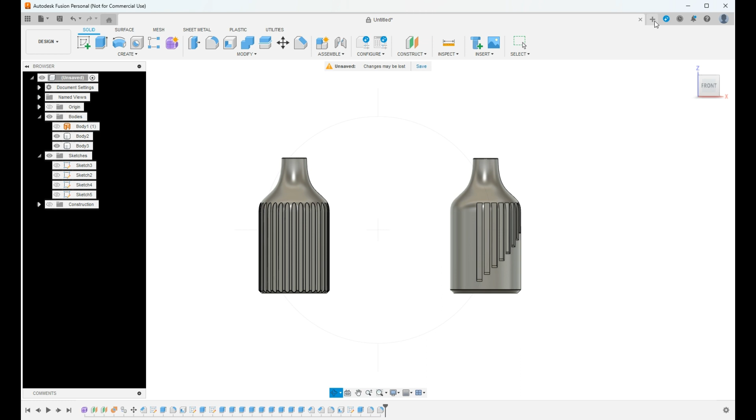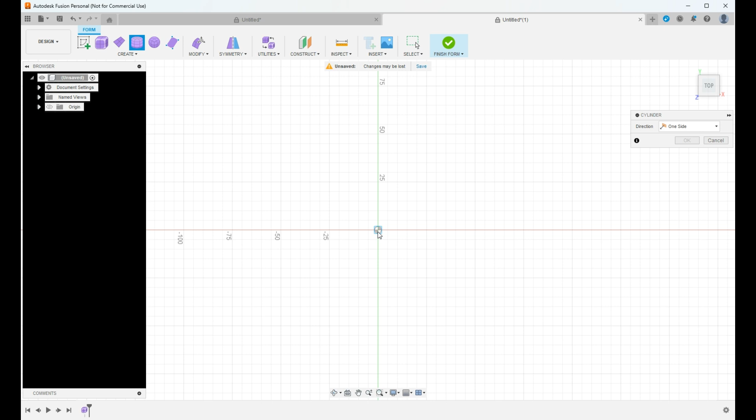In our new window, I'm going to start from the top plane. I really enjoy using the form tool for creating vases, so we're going to create a form, and the cylinder is going to be our closest shape to the finished product. Most vases I like to think of as being at least twice as tall as they are wide, so we're going to come to 102, or about 4 inches.

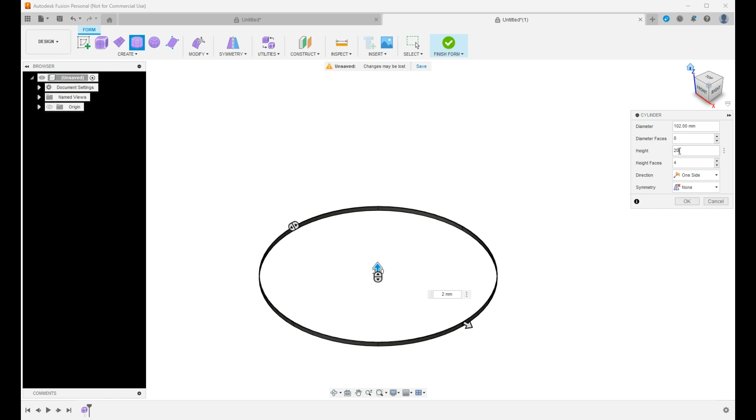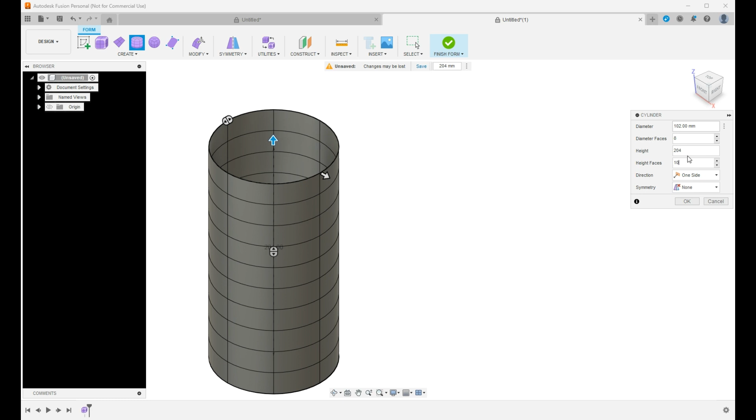And then we're going to come up to 204 millimeters. Here is our very, very basic sketch of our vase, and you can see it's just a cylinder, nothing to it. I'm going to add 10 at a minimum height faces, and I'm going to keep my diameter faces at 8 for this project. Now all we need to do is really modify and make them look how we want them to appear. If you're following along, you can create this however you would like.

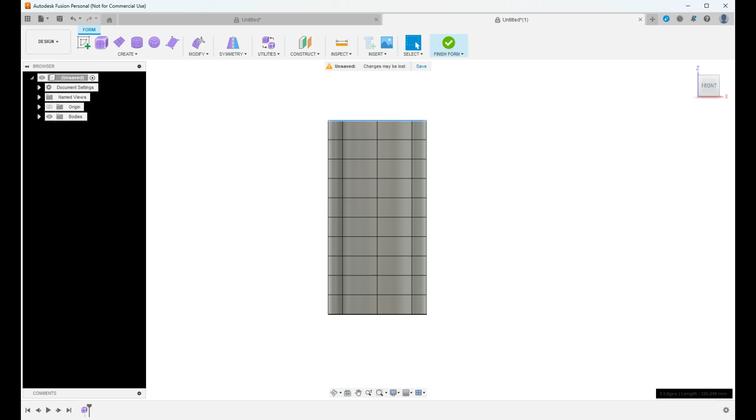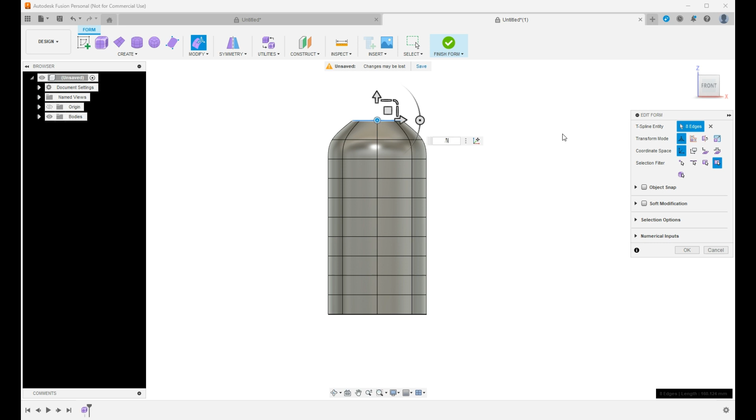I'm going to create this to match what we did earlier. So on this top line coming across here, just a simple double click, right click, edit form, and we're able to affect the edge of the face essentially and bring it in or out. Now I want to keep this, knowing that my diameter is 102 millimeters, I'm going to try to bring this down to about 50. It's going to be a little bit more than 50, but we're going to go to 0.5 and then hit enter. From here I should be able to start to design this and match up with what I want.

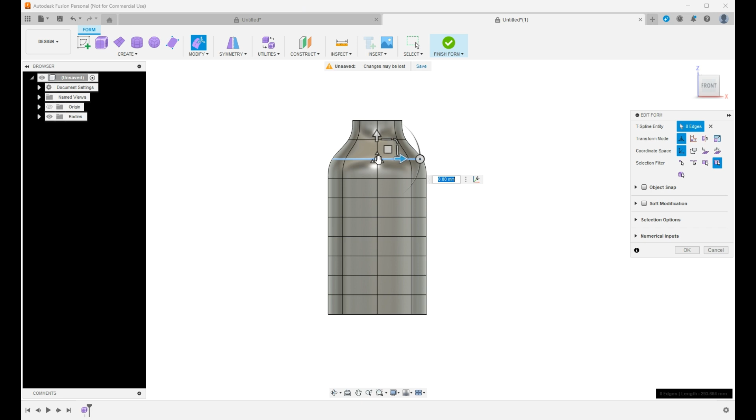Again, I'm going to come down to 0.5 one more time just to get us a nice clean edge. And on this next one, I'm going to bring it down to 0.75, maybe even a little bit more, maybe down to 0.65. Right here you can see I've got a really nice clean base, it looks very similar to what we have earlier. Maybe I'll even grab this one as well and shrink it down just a little bit, just to give us a nice clean edge. Okay, something like that.

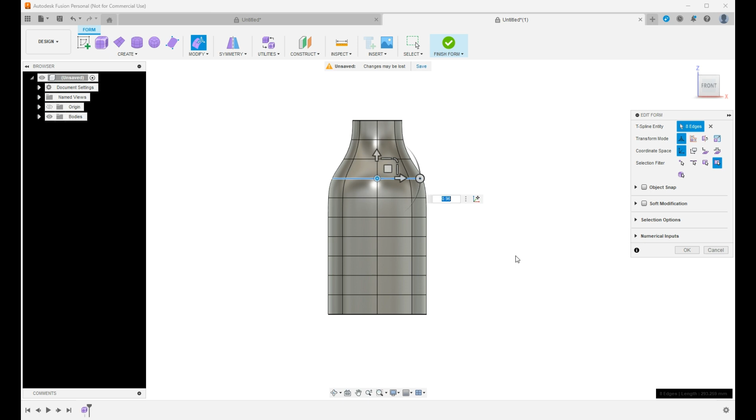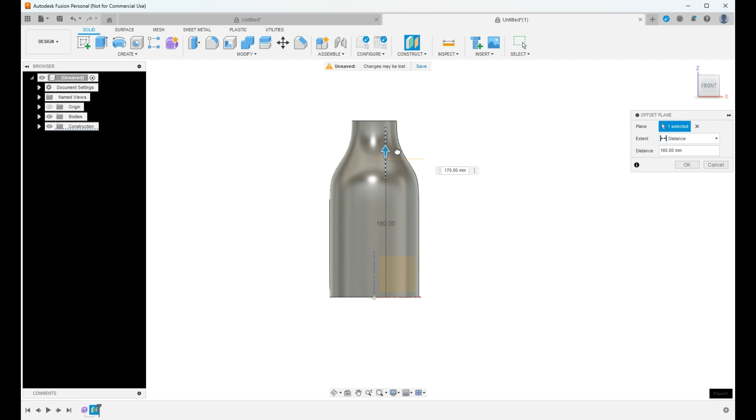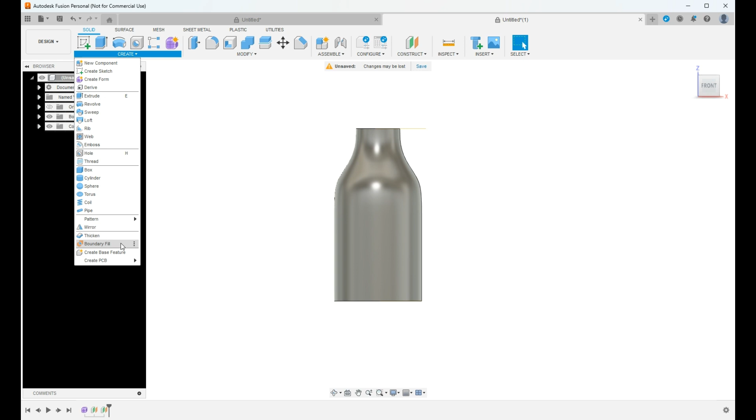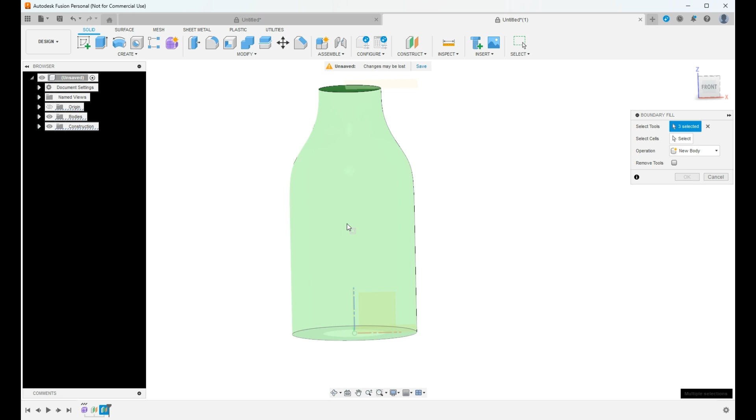I've got my planes. Now what I need to do is create a boundary fill, and this is a tool I use a lot, it's very, very simple. All you need to do is select the top plane that we created, the object that you would like to fill, and the bottom plane that we created. Now this bottom plane is going to be this tiny, tiny little one that we need to grab right there. Once you select all the right ones, it's going to turn green, and it'll have a little checkbox right here. We're going to select that checkbox and create a new body, and say okay - there you have it.

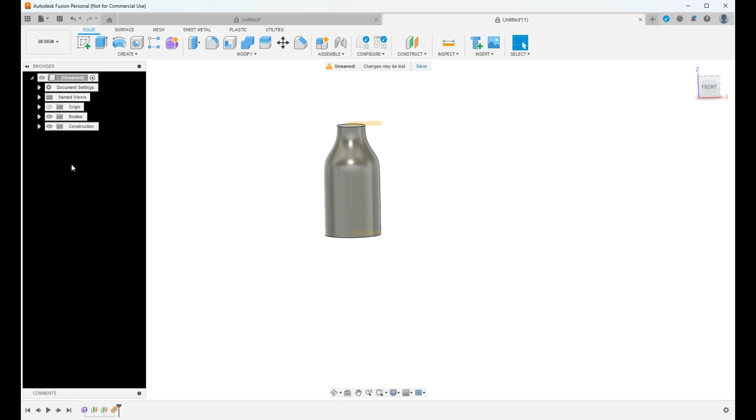So now we've got our basic bottle-shaped vase, and from here we need to make it a little bit more decorative. What I like to do once I get to this point is turn off my construction planes because I don't need to see those. And I'm going to duplicate this a handful of times. The reason I do that is when I'm designing vases, sometimes I'll design 10 or 15 different patterns and play around with it, really just use my imagination as I'm building these. It'll allow me to pick the best ones to add to my store, or if I'm just creating stuff for the house here, I can pick what's best. So we're going to copy this a couple times.

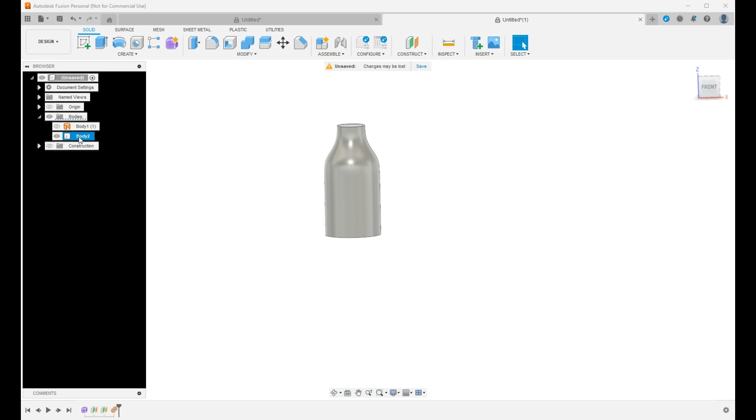So we're going to turn off the mesh that we have there and go into our body, do a simple copy, click out here, and a simple paste. I usually just grab this and pull it to the side. For this case, I'm just going to do the one. I'll usually duplicate this a handful of times, like I said, and say okay, now I'm going to turn off body 3 for a minute, and I'm just going to work on body 1.

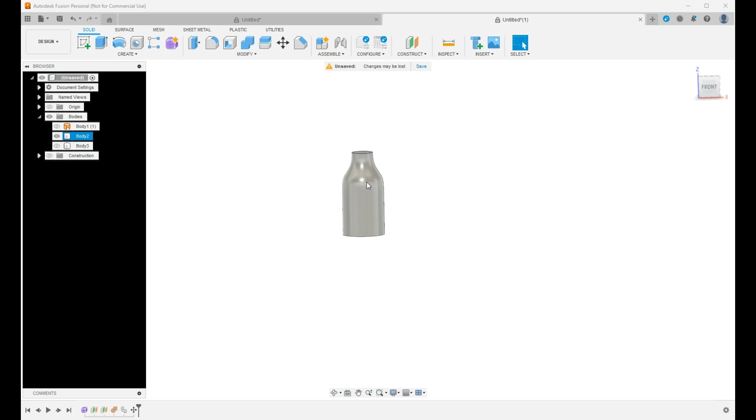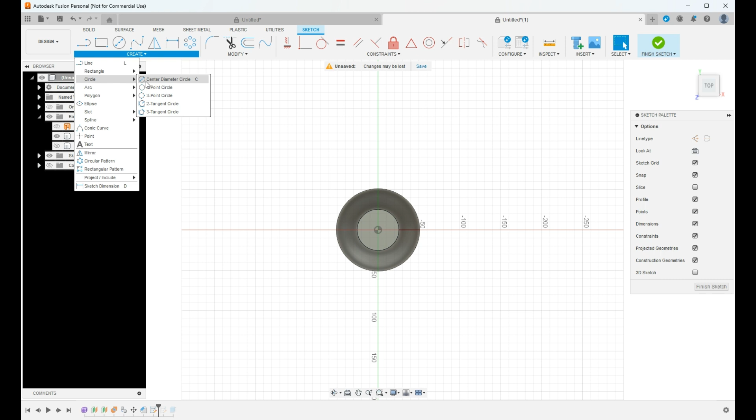Our next step is to go in and add our pattern or the decorations to this vase. So I'm going to go to the top and create a new sketch. On this sketch, I'm going to use our circle and use a center diameter circle. I like to start right on this edge, and I'm going to pull this out to 6 millimeters, which means I'm going to be cutting into this vase about 3 millimeters at the very, very thickest point here.

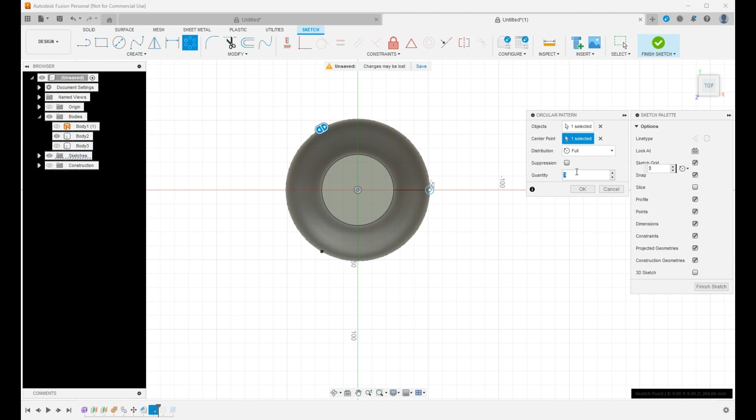Then we're going to do just a simple revolve pattern or circular pattern here by selecting our object and then selecting the center point. I'm going to go somewhere around 28 with this. Now that we've got our 28 circles, I'm just going to say okay and finish the sketch.

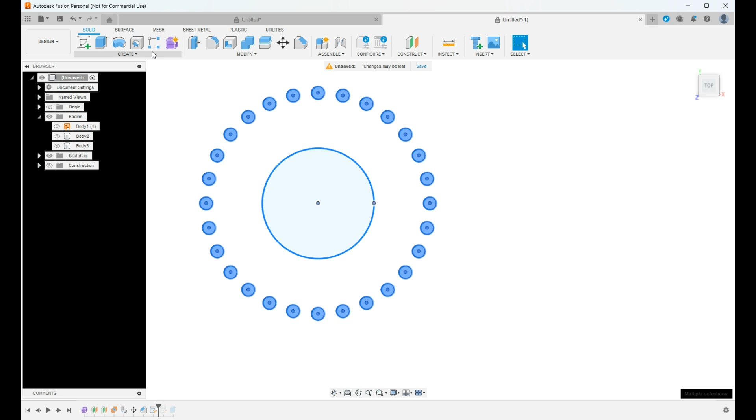At this point, we can do a really, really simple extrude with these. So I'm going to turn off this body really fast, select all of these, hold shift and unselect this center piece here, and turn our body back on. Give us a little bit better of an angle, and we're going to do a simple extrude down through the entire piece and say okay.

And that looks pretty good. Looks just how I would hope it would look, and should be really, really clean.

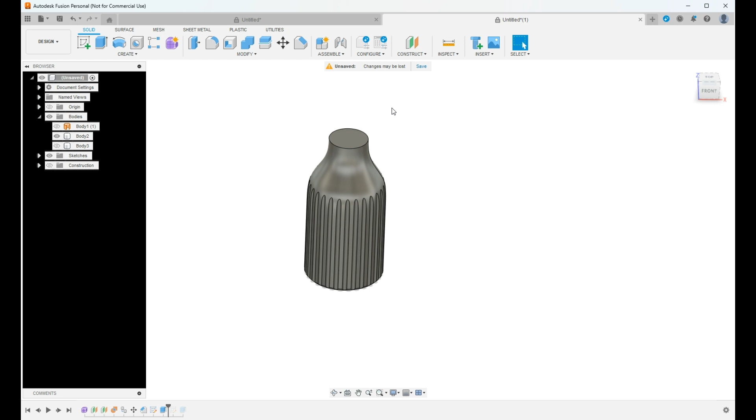Now the next step is to add a shell to this. So we're going to grab our body and add a simple shell. I usually try to do these at 2. Sometimes when you add in these decorations, it gives you a little bit of a fit. So we're going to start this at 2 and see if this works.

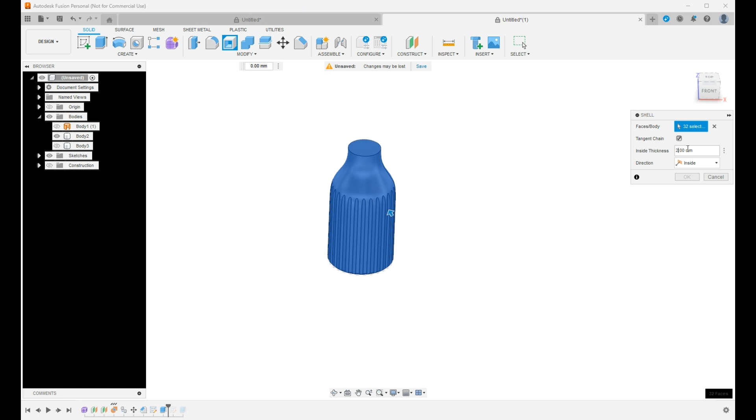Now, if you have a slow computer or you have a lot of things running like I do, sometimes this can take a few minutes to run this command and see if we can actually do it. After I played around with this for a little bit, it looks like 1.5 is the number that it's going to let me go and set. So we'll say okay.

And now the inside of this is hollowed out. Again, like I said, you've got to play around with these to figure out exactly what the best option is going to be and what it's going to give you. Ideally, I'd like to set that to 2, but it looks like that's just not the case for this design.

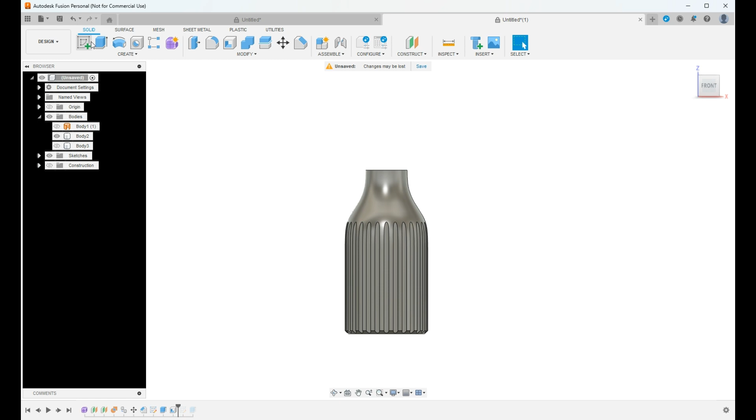Now, the very last step is just to clean off this top so you can actually see down into this. There's a couple ways you can do that. You could just push down. I prefer to just cut off the top. Again, I know that I've got 4 millimeters up here to cut off. And so that's what I'm going to do. I'm going to choose the front, zoom out a little bit, grab this plane.

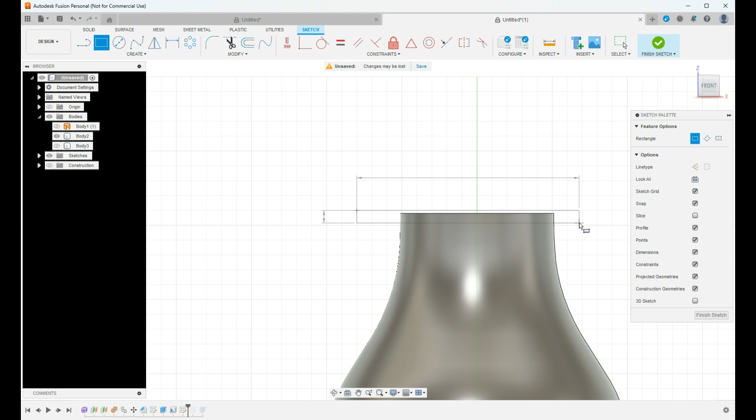Now I'm going to be right in the middle of the object when I draw this. So I can come down here, come down about a little less than 5, down here to about 4, and say finish sketch.

And now with one more simple extrude, I should be able to get this done. So we'll select the sketch, and then I want to make this symmetric and just pull this across and say okay.

Add 0.5 just to kind of clean up that edge. You don't want sharp edges on the top of these when I don't have a whole lot of sharp edges on this object. And that's it. There is the first one done and ready to go.

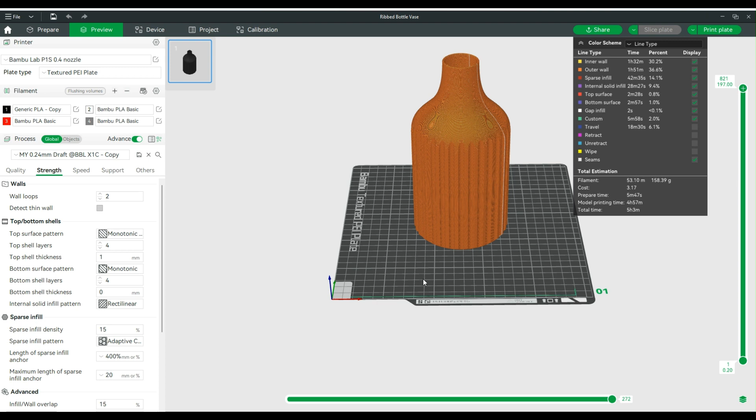After throwing in the ribbed vase, this is what we see in Bambu Studio. It looks like it's going to take about 5 hours and 3 minutes to print at full size with 2 walls, 4 on the top layer, 4 on the bottom, and 15%.

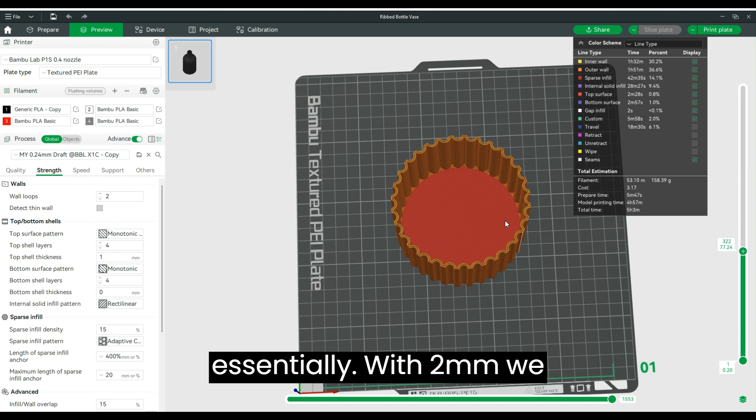This actually really doesn't matter, as I was talking about when I was designing it, because we should get, essentially, with 2 millimeters, 5 walls total, 2 inside, 2 out, and then 1 full wall through the middle, which is what we have here.

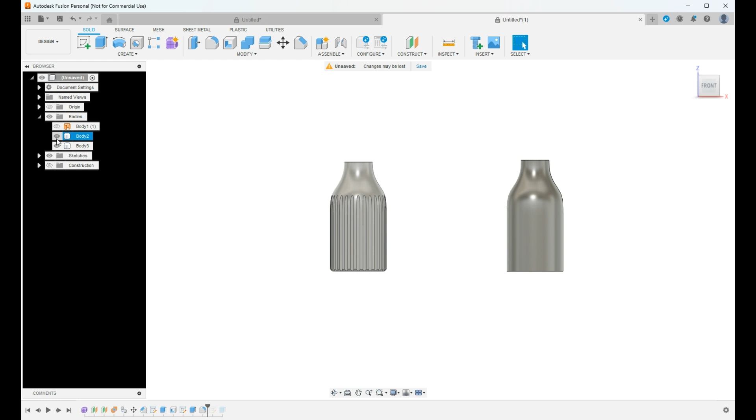Now, the second option that I have, this other body over here. For this one, we're going to do something a little bit different. We're going to design a pattern that's not as symmetrical. It's going to be a little bit different.

So on this vase, we are going to do the same thing we did on the other one. I'm going to add a small chamfer of 4 to this, just to clean it up a little bit. Let's say okay. And the next step is to follow very similar. We're going to come up on top here and do a simple sketch on top of this.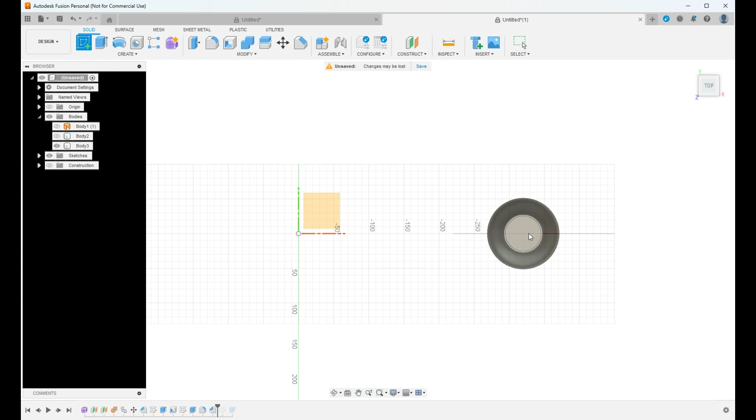And I need to create a circle from the center. So I need to find that center. Usually it'll kind of give you a pretty good idea when you're at the center. If you want to double check, make sure it snaps in there. So I want to come out here and snap in right to this edge, as close as I can get to this edge. Looks like it snapped in right there.

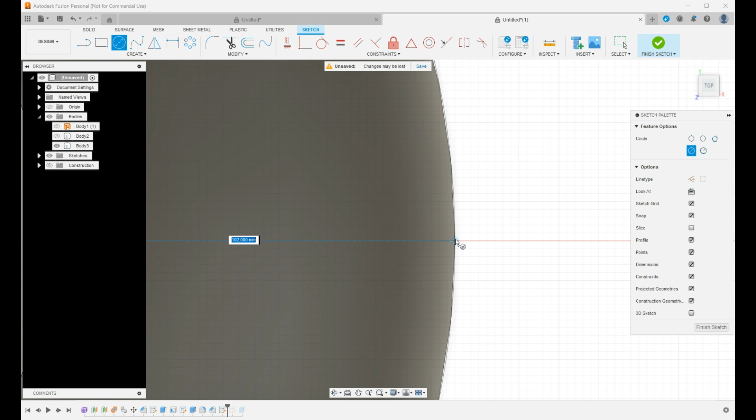And then I'm going to select that sketch and do an offset of -3 millimeters and say okay. Now I've got this line and this line. I can actually take this here and delete it if I want. Definitely going to want it to be out of the way when we go to this next section.

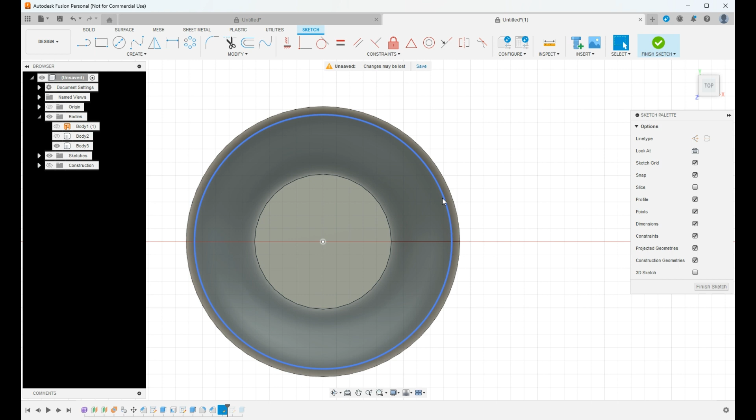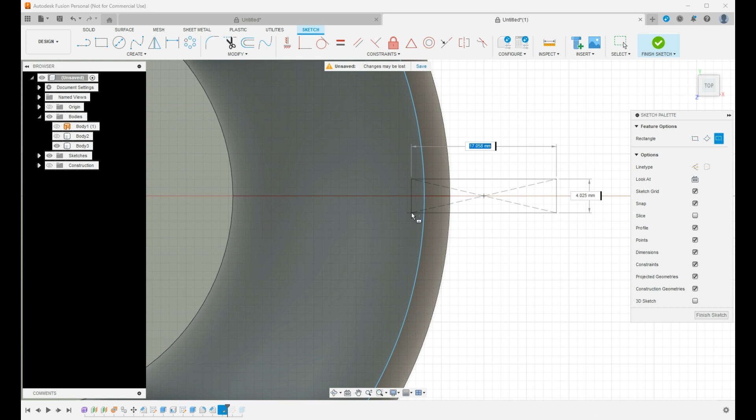So from here, I'm going to use my rectangle tool, and a lot of times I will use a center point rectangle so I can keep everything on line with this. And I'm going to grab this and set my gap to 4. And then I want to make sure that I pull this past this blue line. And just make sure you get it past it. You can make it as far past it as you would like, 4. And then I'm going to say enter.

So now I've got this shape here. And the reason we want this is it's going to keep us from having this sharp edge here. It's going to give us a nice flowing line when we do our next step.

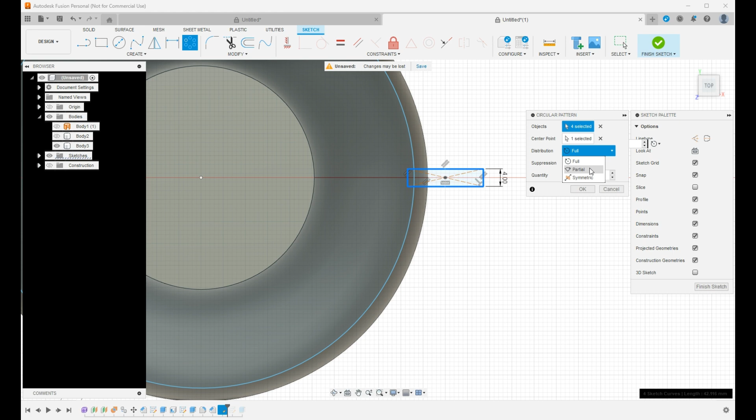So from here, I'm going to do a same circular pattern as we did before. Grab these and select our center point. Looks like I need to grab one more down here really fast. And I don't want to do a full, I want to do a partial distribution around this. And I'm going to set this to -100 degrees. This will just bring us out across the face.

And I want to go just past 90 just because nothing else is going to be symmetrical on this. Why not keep it to there? And then figure out exactly how many of these I want to put in. And we're going to go with 8, looks pretty good. And say okay.

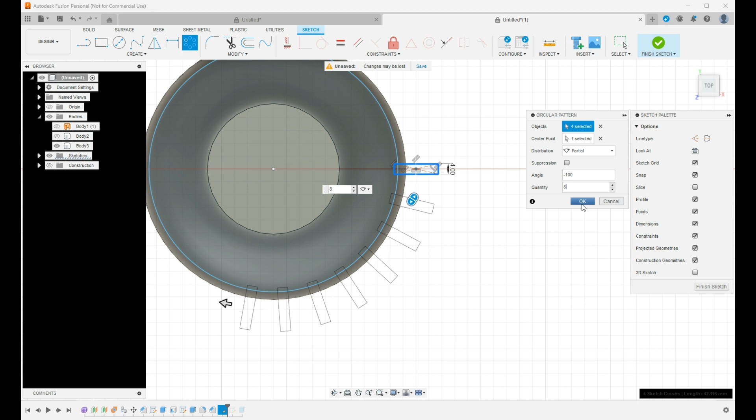So from here, we are done with our sketch. And we're just going to rotate this and revolve it. And I need to grab all of these and pull them down with just a simple extrude. But the problem is I'm going to do this one at a time. So I'm going to speed this up as I do this.

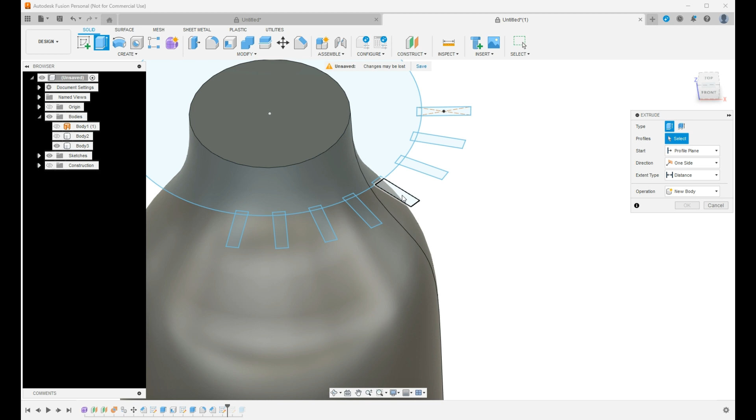Basically, I'm going to go down 100, 110, 120, 130, 140, 150, 160, 170, and it should give us a nice look that we're looking for. So we're going to grab this and pull this down to 100. Say okay. Turn our sketch back on and repeat that process. So stick around as I get this done.

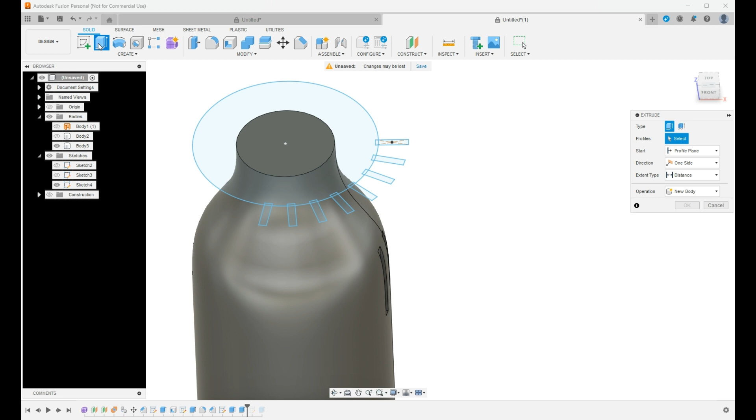All right, and we're back. As you can see, it was pretty quick, and I think it turned out pretty good.

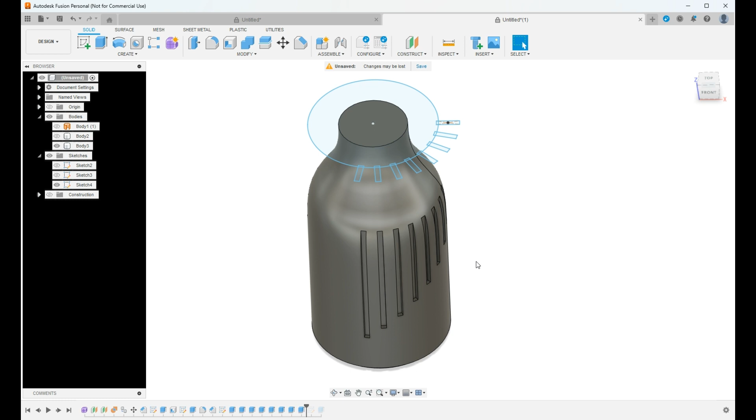I do like these nice thin lines. I think it adds an element of just unbalance to this that I really like for home decor. And again, you can play around with patterns, do whatever you like. That part is really easy.

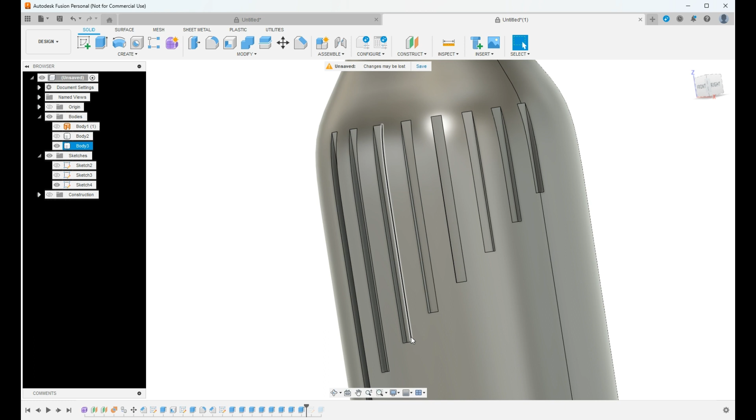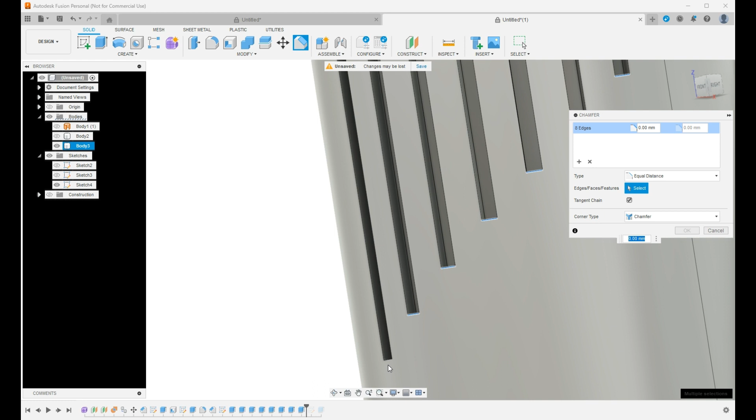Now I do need to add in one thing before we shell this. I need to add a chamfer to these so that we're not trying to print on an edge. The easiest way to do that is click on our chamfer and just grab this front part on all of these. I know I'm going to be close to about 3 millimeters, so it should make setting the chamfer pretty quick to get the actual number I'm looking for. So I'm going to rotate this a little bit, zoom out, and then zoom in just so I can see what's going on here.

And sometimes you have to kind of play around with this to get it to work. Looks like I'm going to have to just manually do this because it's wanting to jump around too much. Go to a 2 and a 3, which is where I thought I need to go. But it looks like that's going to be too much. So looks like we're going to play around with some smaller numbers here.

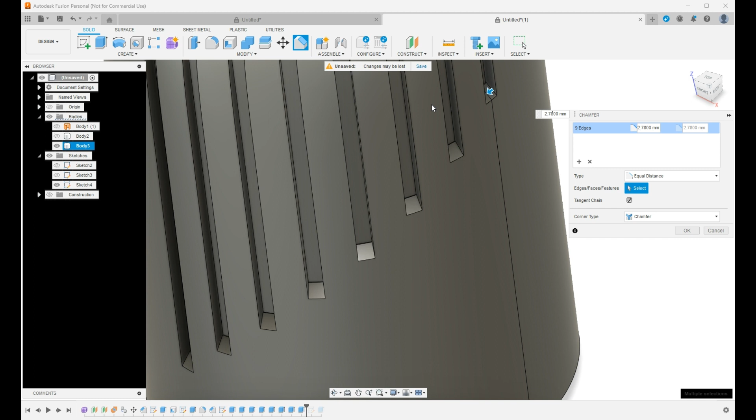7, 5. That looks pretty good. That looks like I've maxed that out. I still got a little bit of a shelf. Maybe we can go... There we go, so 2.9. And that, when we print that, we shouldn't have any issues. It should print really, really clean right there.

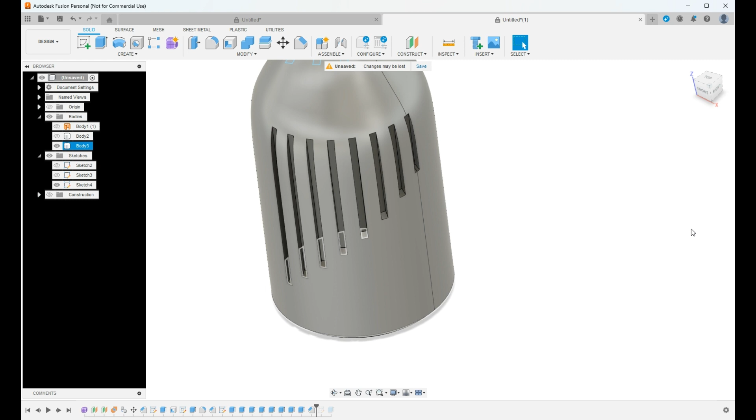Okay, and just like we did before, we'll turn off our sketch. And I'm going to select our body, and we're going to add a shell. Based on our results from last one, I'm going to probably see something very similar here, where we're going to set this to 1 and see if it lets us do that. Looks like that's the good number for us here.

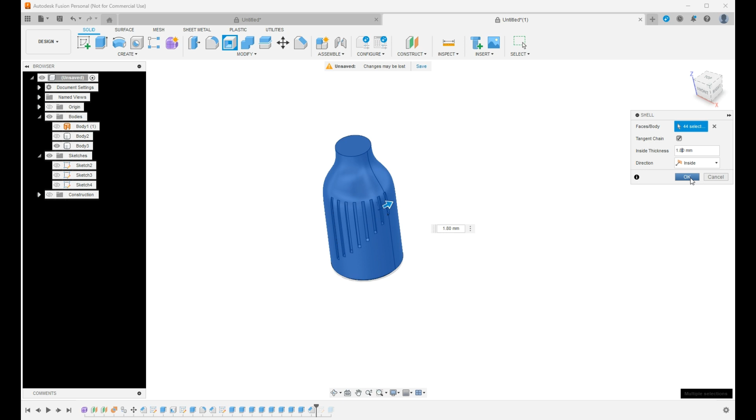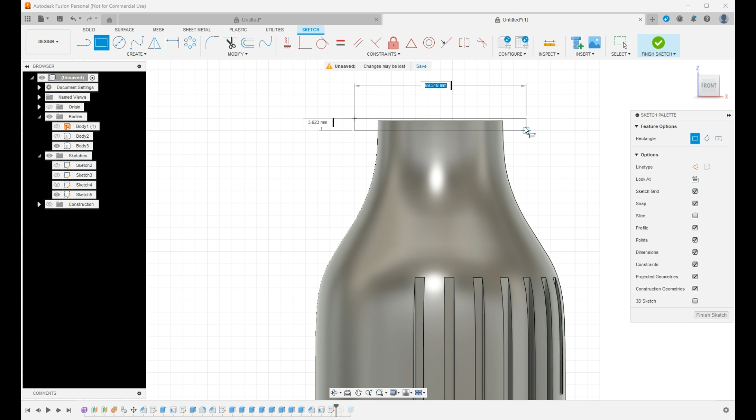And say OK, and we'll come and knock this top off just like we did before. Grab the front, and this should set our sketch right in the middle, just below 5. Sometimes these guidelines hurt more than they help. There we go.

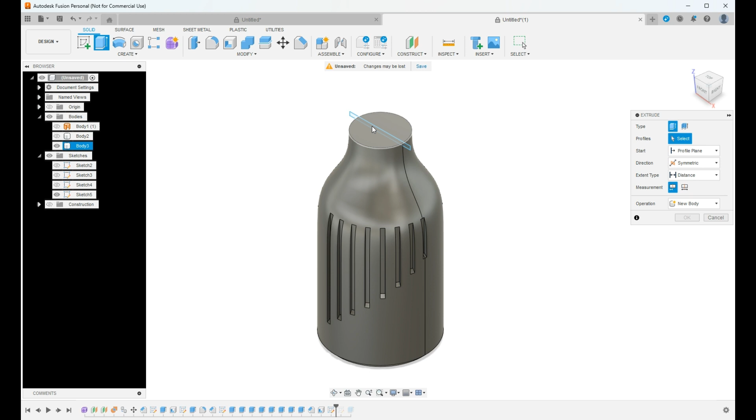And finish this sketch. And we're going to extrude this again, doing a symmetric. Say OK. And the very last step, just clean up this top edge.

Here we have our second pot sliced and ready to go. Looks like it's going to take 3 hours and 46 minutes.

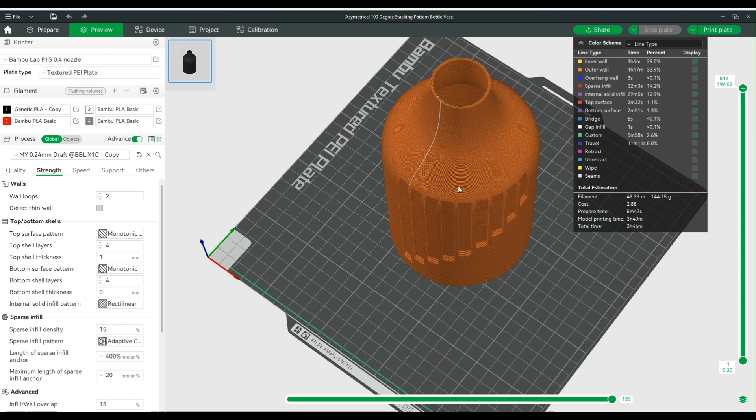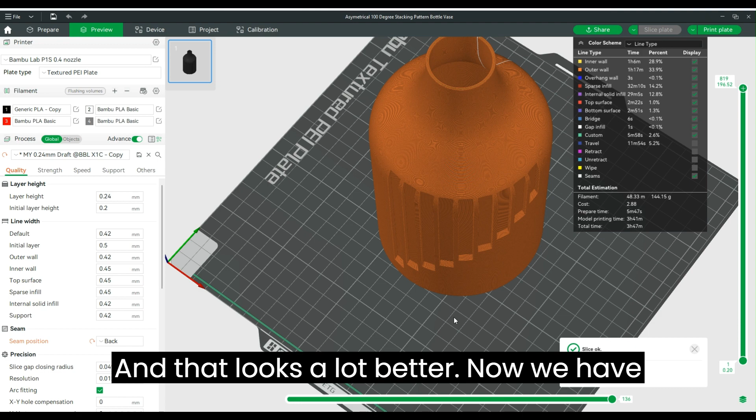A little less movement here. Just did notice one thing really quickly - this seam is coming right through our design. I want to push that to the back really fast. So I'm going to come over to quality and seam position and move this to the back. And then we're going to slice this really quickly one more time. And that looks a lot better. Now we have that seam hidden, and our design should look really, really good.

I may want to twist this a little bit on the plate. I'll play with that around later before I print this, but this is what you get. And it's going to print relatively quickly.

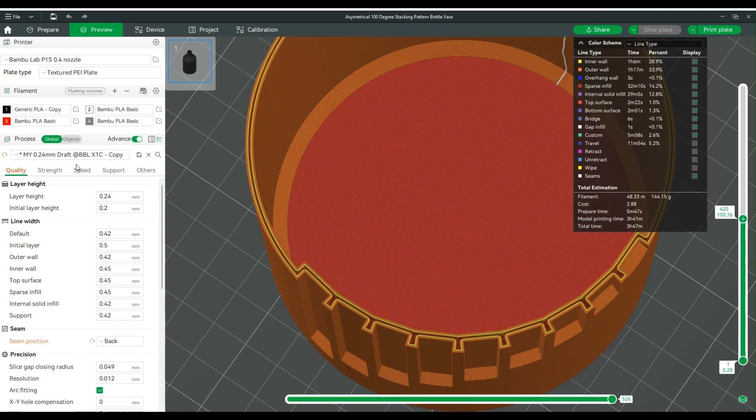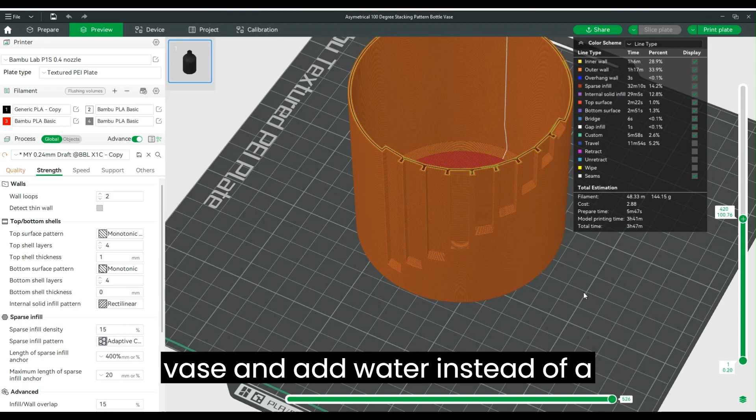And just jump in here so you can see what the layers and the walls are looking like. Again, we've got 2 inside, 2 outside, and 1 through the middle, just like we had last time. We will get a little bit of slowdown through here as it does a little pattern trying to tie everything together and make it look good. But this is going to be really, really sturdy at 5 walls and should actually hold water really, really well if you wanted to use this as an actual vase instead of a decorative vase.

And there you have it. I've got a couple different vases that we designed relatively quickly and easy. And again, these are just easy, simple patterns. You can rotate these patterns and do them at different angles. You can add in... kind of do whatever you want with these. Have fun with it and make it your own.